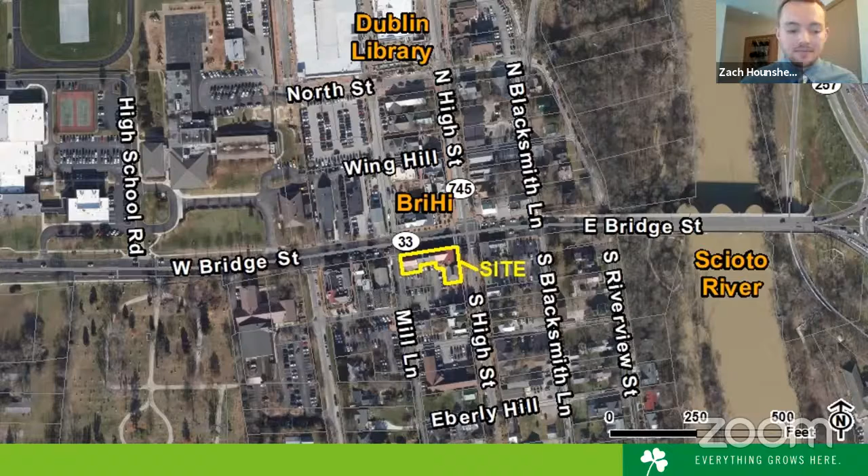Good evening. This is an application for review and approval of a master sign plan. This site is located at 5 West Bridge Street, which is located within the Old Dublin Town Center 1 development. This site is located at the southwest corner of West Bridge Street and South High Street. This tenant space was included in the sign package for the entirety of the Old Dublin Town Center 1 building. With the sign package, this tenant was approved for 1 projecting sign, located along West Bridge Street to the north, 2 window signs, located on West Bridge Street and South High Street, and a directory sign, located to the rear of the site, which can be seen from the parking lot.

This directory sign is located next to the entrance into the building for this tenant space. Since the acceptance of the Bridge Street District Code in 2012, the Bridge Street District Code supersedes the original sign package for this building.

Similar to Jeni's Splendid Ice Cream application in 2013, any new signage for this building has to adhere to the Bridge Street District sign guidelines. So what this means for this tenant, because they are a 2nd-story tenant in a multi-tenant building, they are not permitted to have any wall-mounted signs along West Bridge Street or South High Street, because their entrance is located to the rear of the building.

Any wall-mounted signage is required to be located adjacent to the entrance into the building. So a master sign plan was the only route to be able to maintain the existing location of the projecting sign.

The applicant is proposing just one new sign tonight, which would be the projecting sign, located to the north of the building along West Bridge Street. This sign is approximately 6 square feet in size and sits 18 feet above grade. This measurement is measured from the top of the sign to grade.

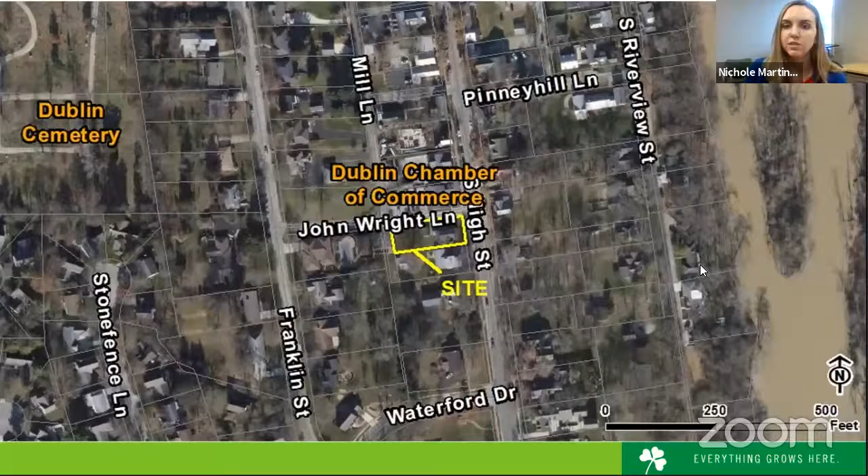As mentioned, this is a second request for informal review and non-binding feedback. This application was previously before the board on June 3rd. The site is located at the intersection of South High Street and John Wright Lane and is 0.25 acres in size. The site is presently developed with a single-story residence and detached garage.

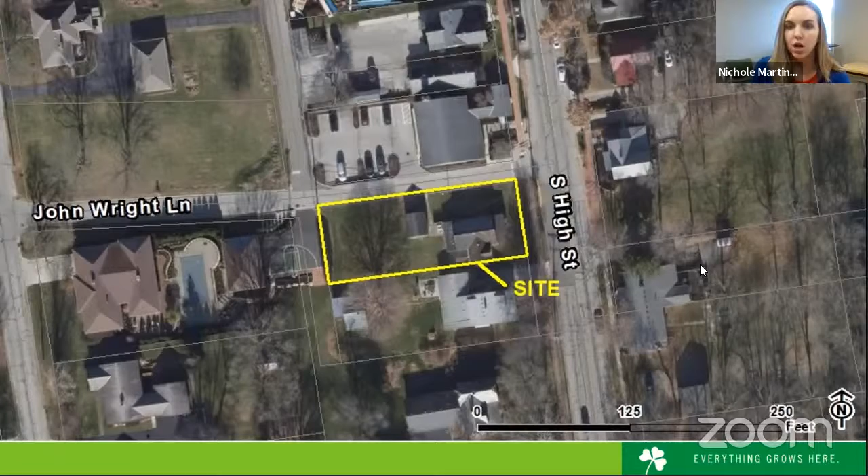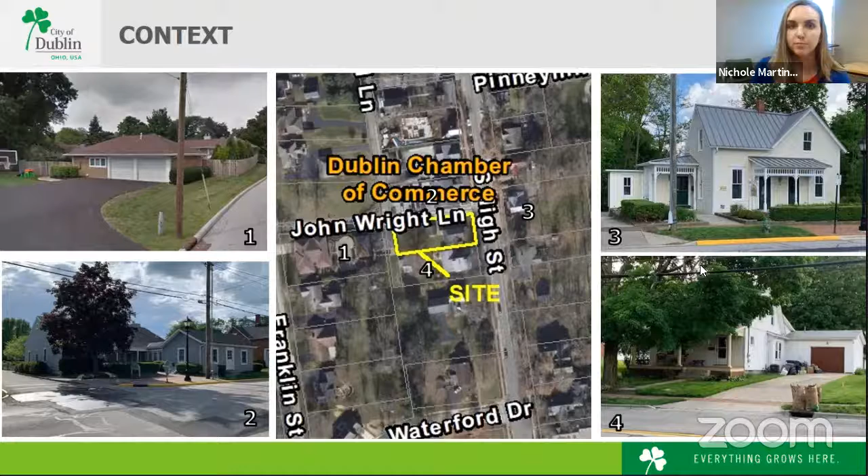The surrounding context of the site is primarily residential, with the Dublin Chamber of Commerce located immediately to the north. This is an image of the existing residence and detached garage. This structure was built in 1890.

The board at the June meeting previously deliberated on this structure as well as a proposal for new construction. At the meeting, the board provided non-binding feedback in support of demolition of the existing structure, in support of the simple vernacular architectural character of the proposed new construction. The board also provided consideration for encroachments into required setbacks, expressed concern with the total lot coverage and building footprint, and also encouraged that the mass and scale of the home be reduced on John Wright Lane.

In response to the board's feedback, the applicant has taken the proposal from June, shown on your screen, and made revisions accordingly. Staff also shared the application with the city's historic preservation consultant. We felt it important to do that at this time, given the project is still at the formative stages where comments and tweaks may be beneficial to the board and the applicant.

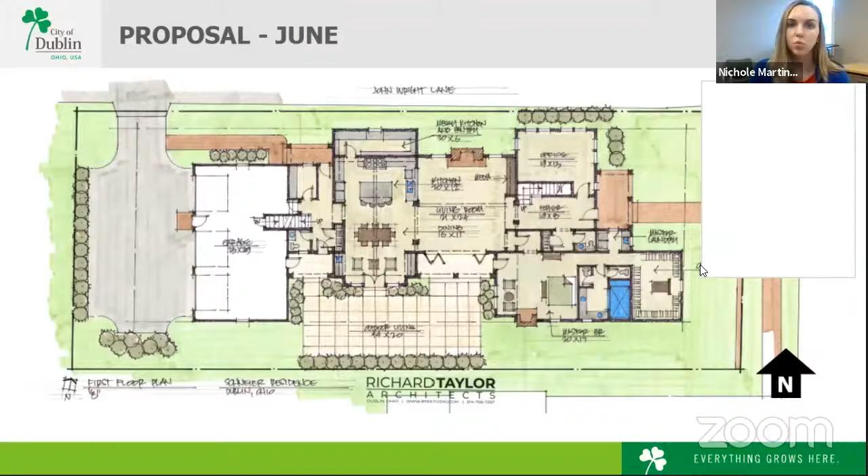This is the proposal as of July. You'll notice here, as outlined in your staff report, the access point along John Wright Lane to the north side of the site has been shifted east approximately 20 feet at the request of the city engineer, to provide greater separation between the intersection of Mill Lane and John Wright Lane.

Additionally, the applicant has modified the proposed setbacks along the north and south sides of the property. The north setback has been increased from 4 feet to 5 feet, and the south setback encroachment of the at-grade patio has been eliminated. With this revision, the applicant has reduced the total lot coverage from 62% to approximately 56%.

The applicant has distributed this lot coverage across pervious and impervious surfaces. The impervious surfaces are approximately 48% of the site, with the semi-pervious surfaces being approximately 8%.

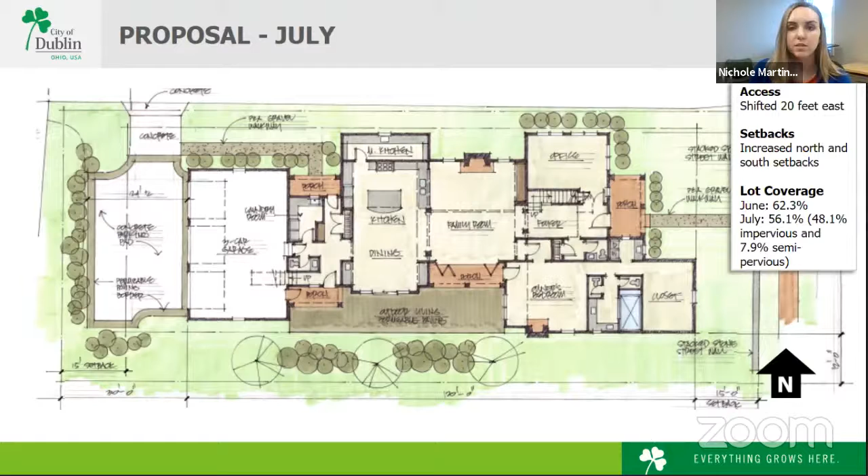With the refinements, the applicant has selected conceptual proposed building materials that they are seeking feedback on this evening. The primary building material is a split veneer stone in a limestone finish. Additionally, an LP Smart Shake shingle siding is proposed in a white color, and an LP SmartSide board and batten siding in a medium gray is also proposed. Other materials proposed include a standing seam metal roof in a slate gray color or a weathered zinc, and also wood-clad windows in a charcoal or espresso color.

The board has previously provided applicants feedback regarding the combination of materials and the window color. Staff specifically noted in the staff report that they have previously provided feedback on primarily white buildings with dark brown or black windows.

These elevations depict the June proposal on the left-hand side and the July proposal on the right-hand side. You'll see the elevation facing South High Street remains largely the same. However, the applicant has made refinements. The gable ell portion of the home is clad in the limestone veneer with a brick stoop.

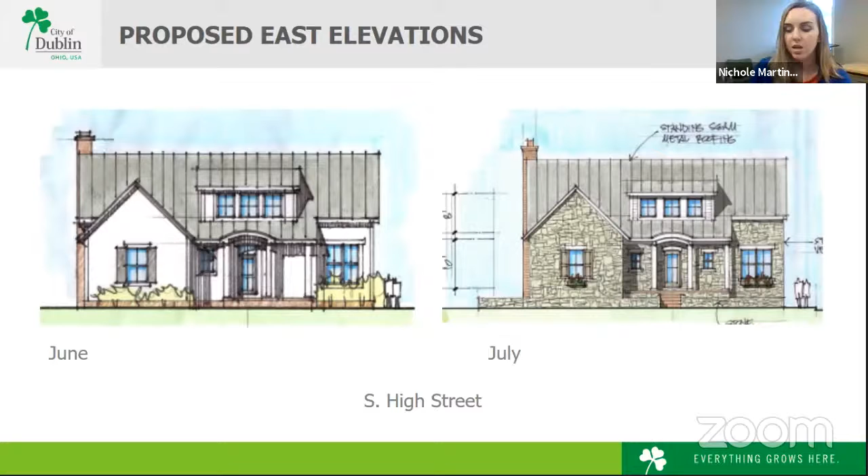The architectural consultant noted that it is more historically appropriate for homes that are primarily stone to have a stone foundation and stone chimneys, although did note that a brick foundation may be appropriate for the attached garage, as garages were typically later additions to homes.

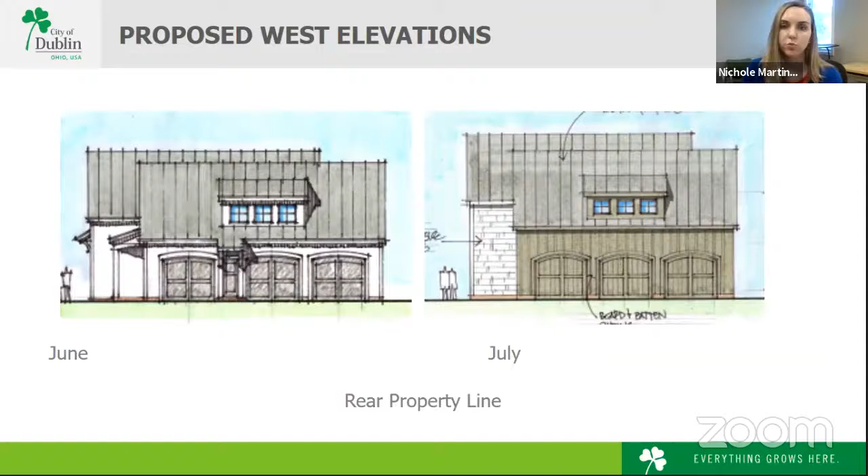The historic preservation consultant did note in her report that if the occupied space within the garage was reduced or eliminated, there would be an opportunity to further reduce the mass and scale of the attached garage.

Finally, the south elevation has been refined with the material selections as well as the reduced scale of the hyphen connector between the primary residence and the garage.

The architectural consultant did hone in on the intersection of the brick chimney, the gable L stone masonry, and the lean-to addition, basically citing that there were potential opportunities to simplify the intersection of those three materials.

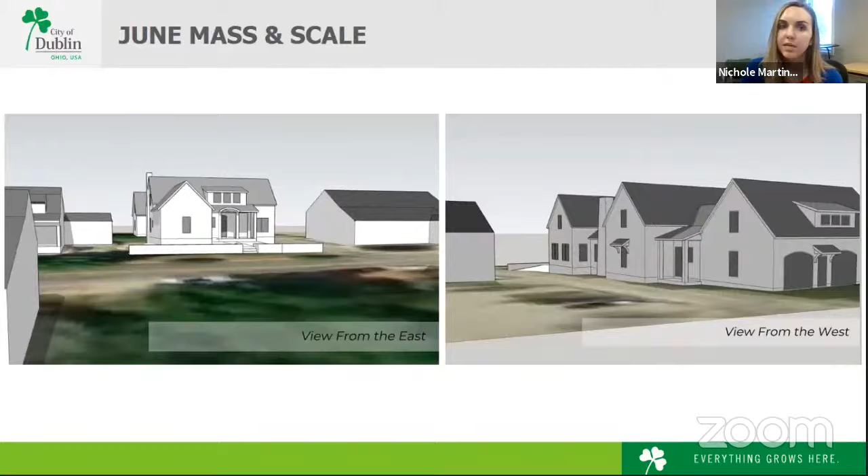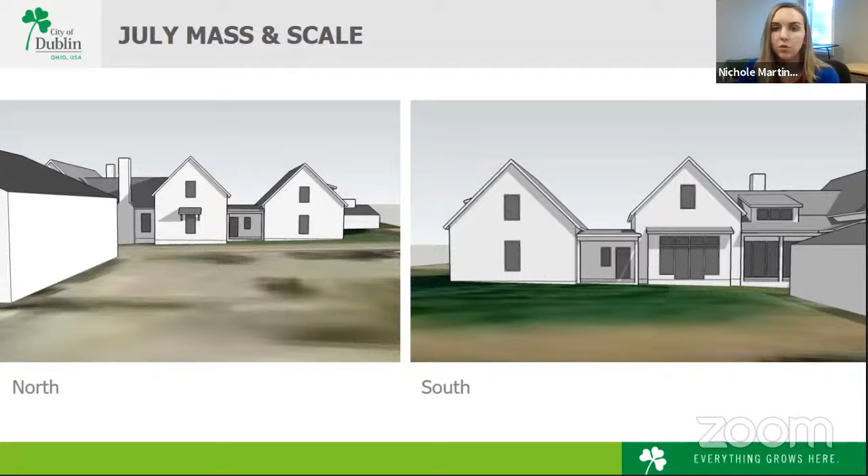Finally, the applicant has provided updated massing and scaling. This example is from June. With the revisions, the applicant has provided images depicting the mass and scale, particularly of the garage, both along John Wright Lane to the north

and from the property at 155 South High Street to the south. With this, staff is recommending the Architecture Review Board consider if they support the proposed site layout and lot coverage,

realizing the need for a waiver to lot coverage to exceed 50%. Does the board support the proposed mass and scale of the revised design in relation to the surrounding development pattern? And finally, does the board support the conceptual architectural details, including the materials and color palette?

And then, of course, any other considerations by the board. I'm happy to answer any questions. Otherwise, our applicants are here as well tonight.

Any questions for Ms. Martin?

I had just one, just because my first time. Can you hear me? There's a lot of feedback. What's the role of the Preservation Design Limited? They're just giving consulting advice, or what? When you look at this, as a board, what do we do with the information they've given us? Is this something that's just added material we're looking at from their perspective, or from their background, just so I can be clear on what their role is?

Yeah, no worries. So we use a historic preservation architectural consultant. Her name is Christine Trebelis. She is a trained planner as well as a trained architect. And based on her architecture experience as well as her historic preservation experience, we rely on her to provide some additional expertise in regards to architectural forms and materials.

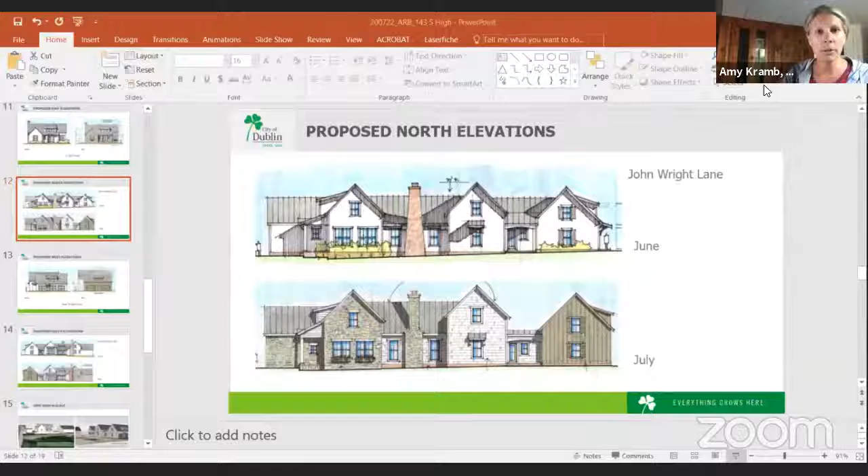Thank you. Amy? Yeah, so I'll just go through a couple things that were in the consultant's notes. Regarding the foundation, I get where you were going with it, because you were trying to make it look like an original stone gabled L, then a framed addition, and then the garage. But like Gary said, the massing and the slopes and the windows are all the same. So I would go ahead and keep the same foundation all the way across. Personally, I think the stone foundation would look great all the way across.

And then the same, the consultant made the point about the brick chimney. I think they should both be stone. Same concept, just carry it, one less material, keep it all stone foundation, stone chimney. As far as the siding, I'll disagree with the consultant. You can have both the horizontal and the shake, I think that's fine. Shake doesn't just have to be an accent. I actually have a house where my whole upper story is in shake, and that's original. So if you want to do the whole thing in shake siding, that's fine too.

So I'm fine with the siding that's been chosen. Personally, I would do as few treatments as possible, so one type of siding, stone, and then the garage could be separate.

That's fine, but 3 maybe instead of 4. And then the consultant had an issue with the windows being dark. I have no issue with that. I'm totally fine with dark colored windows.

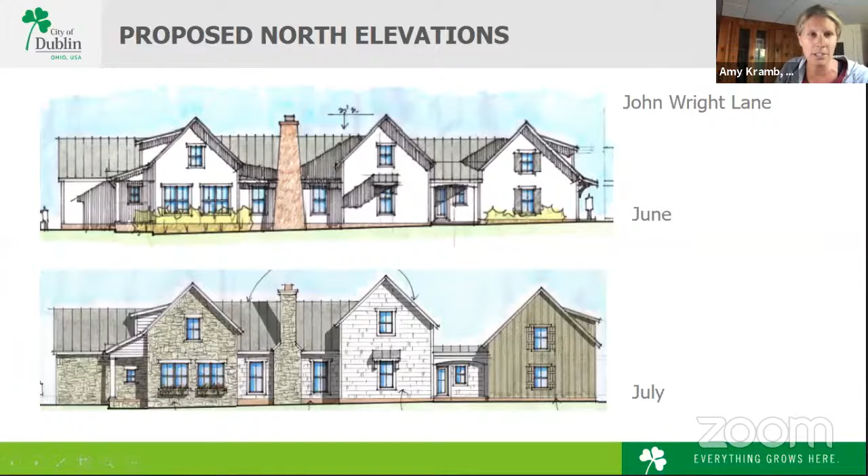That was all of the, I guess, material questions. The consultant said something about not having the off-center chimney on the south elevation, and I disagree with that. Chimneys are off-center all the time. They're not always centered on the gable.

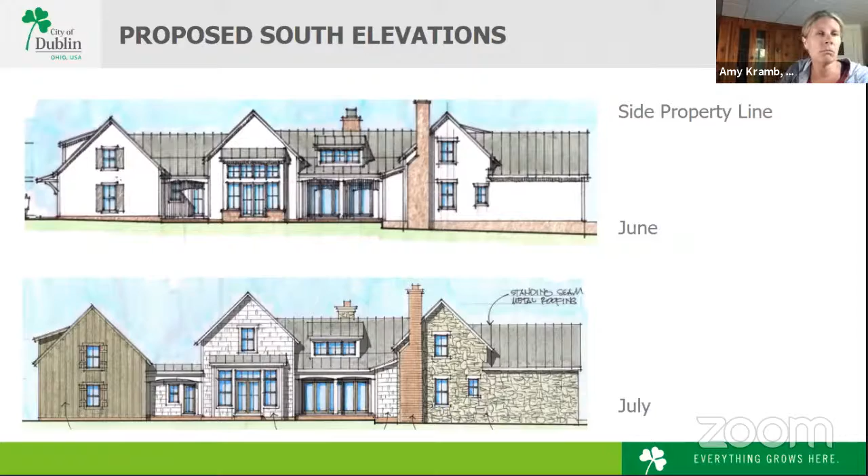Otherwise, I think that's it. Okay, thank you. And my comments are very much the same. There are too many materials, so I was like, where does my eye land? And I don't think you do any of them justice by having so many.

I'm fine with the off-center chimney, but I think it needs to be stone. Actually, I kind of think it's cool to have it a little off-center. So I reiterate many of the comments that have already been made. The bottom line is there's still concern over mass and scale, and the number of materials that we have in play.

really long and take up the whole lot. Now, I was not on the board when those were approved. I don't think they would be approved at this point. Okay, because I think what we have now is way better than those two. Yeah, this board would not have approved. Okay, so I'm just curious as to the history and the reasoning behind those two, which do take up the